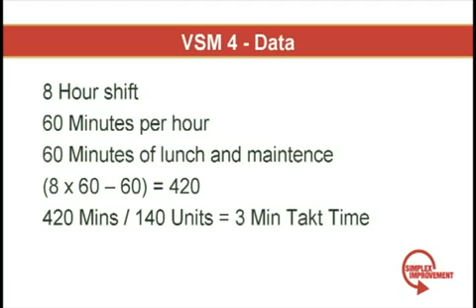Now, with each iteration, the CEO wisely tells us to continue to refer to the ideal state map. He always makes sure that the team is focused on the final state they are attempting to build. The team keeps this in mind and realizes that in order to reach the ideal state map of a dedicated cell, they need to start focusing on shifting workers to balance cycle times to meet this 3-minute takt time.

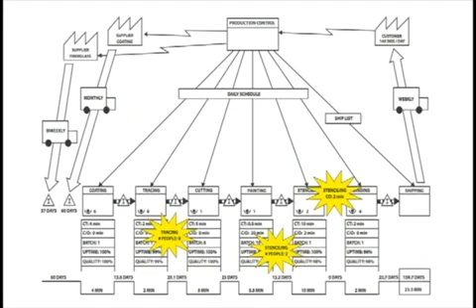The state-of-the-art painting booth is a challenge because it's designed for large batches and the accounting department wants a quick ROI. So the work continues, and by the 5th iteration, the team is able to begin dedicating small areas solely to red skis. Only the large paint booth still services all product families and remains a shared resource.

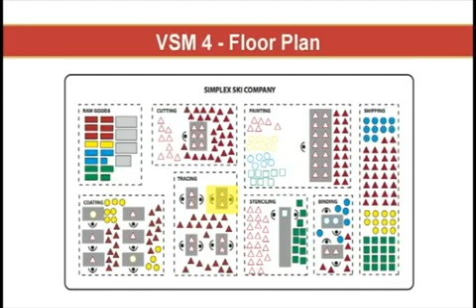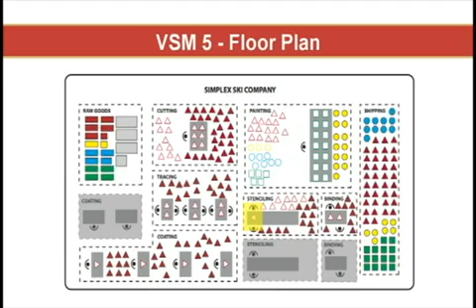In order to create a stenciling area dedicated to red skis, we needed to shift 2 operators from the now overmanned tracing area. 2 operators in the Value Stream Mapping, or VSM team, agreed to move over to the red ski stenciling area. Take a moment to notice how the shop floor is starting to change. On the 6th iteration, the team continues to work on the cycle times of each station to meet the 3-minute takt time.

By the 7th iteration, the team gets to the point where they've driven down cycle time per operator and feel confident by the next iteration they can work towards single operator stations. By the 8th round, the floor begins to take shape. Notice how much less clutter there is on the shop floor. Each station, except paint, now has a single dedicated worker.

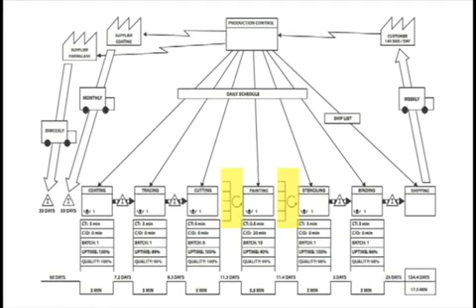In this iteration, the team is also working toward establishing a pull system. Notice the supermarkets that were put in place right after the cutting and the painting areas. The team takes a look at the ideal state map and realizes in order to create a cell with flow, they must first master pull.

By iteration 9, the team has grown frustrated with the paint booth dilemma. Painting takes seconds, and they've done as much Kaizen as they can do to reduce the setup times. We successfully reduced the paint booth setup times from 30 to 20 minutes. But the high-tech nature of the machine makes physical modifications prohibitive.

One of the operators on the team suggests that we dust off the old manual paint stations that are sitting in the warehouse collecting dust. These were retired 2 years ago after the VP of Ops saw this new paint station at an expo in Atlanta. With a little cleanup of the manual station, they could be installed and ready for use.

The CEO catches wind of this and confronts the team. He obviously wants us to make the best use of our high-tech investment. The team shows him the ideal state map and reminds him that the high-tech paint booth doesn't fit the model. The CEO reluctantly agrees. The team has proven to itself and the rest of the shop floor that the pull system they installed works great.

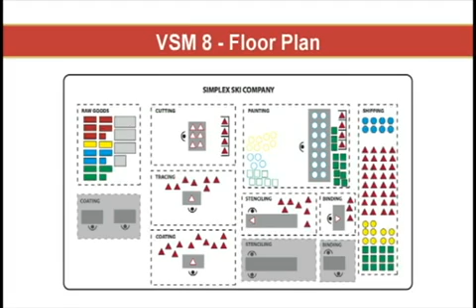And with this new/old manual dedicated paint booth, the team is ready to actually segregate the area and begin working in a production line. Prior to this, we had dedicated stations that were still in a process village format. Moving stations close together to create pull and then eventually flow is in line with our ideal state map.

Now, finally notice that the team has demonstrated their improvements and feel confident to the point of increasing their shipment frequencies. They negotiate a deal with a customer who is more than willing to pay a premium for the daily deliveries. The customer is delighted because it's a win-win for both parties. He's happy because he doesn't need to dedicate valuable floor space to store a week's worth of skis. They take this money and apply it to the additional shipping costs associated with the more frequent deliveries of raw material fiberglass. Now, the Simplex Ski Company is shipping and receiving more frequently.

By the next iteration, with growing confidence in the more frequent deliveries, production, uptime, and quality, the team feels it can decrease inventory across the system. Notice the radical change to the shop floor and the proximity of the stations to each other. In this next iteration, the team and the shop floor are now comfortable with using withdrawal and production Kanban.

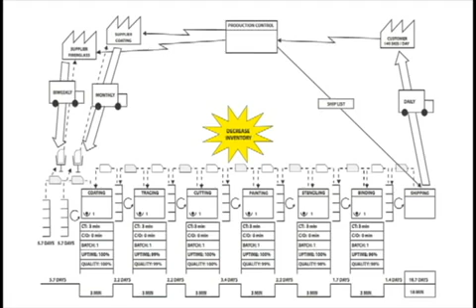Now, because of the proximity of the stations, one of the team members asked if we can do away with cards between stations and create FIFO lanes, or first in, first out lanes. He argues that all the stations are stable enough to begin producing to a very small FIFO lane. This makes the team a bit nervous because this would eventually call for the significant decrease in WIP, which has kept the system running smoothly. But the team decides to take the training wheels off.

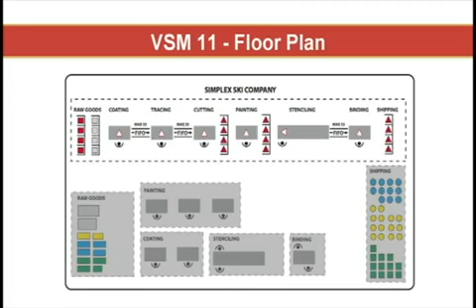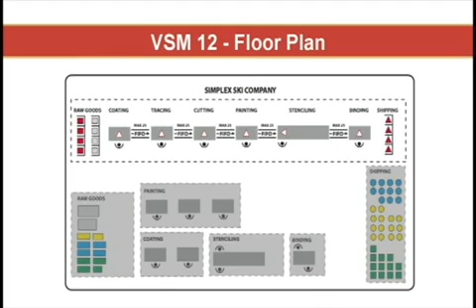The math proves out, and in the spirit of Kaizen and the ideal state map, the team decides to give it a shot, and all the stations except cutting and painting, which are still a bit unstable, are moved to a FIFO system. Cutting and painting will send their Kanban back to the beginning of the line where we're trying to establish flow. By value stream 12, the team decides to go with FIFO pull only. The only supermarket pull would be from the shipping department. Units shipped will trigger a Kanban to go back to the beginning of the production line and start production.

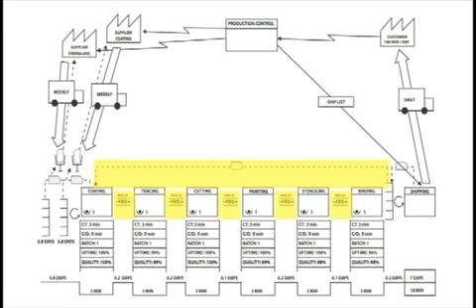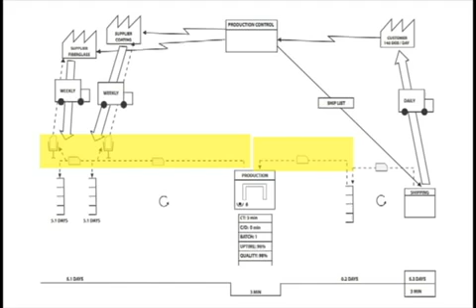By value stream 13, the team proves out the improvements and want to decrease inventory in the FIFO lane to none and begin exploring the dedicated U-shaped cell seen in the ideal state map. This is presented to the CEO, and he's very excited to see the concept prove out. The shop floor once again is rearranged and a cell is established. It's manned with the same 6 people, and they're very comfortable now working side by side. Kanban flow out of the cell to request raw materials and flow into the cell to trigger production. The system runs very smoothly.

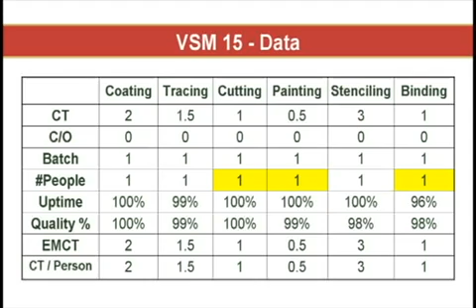Now, by value stream 14, the CEO is very excited by the improvements we made. He wants to stop and move on to replicate this on the other product families. The same paint booth operator objects. He explains that there's still opportunity to drive to the 3-man cell and that abandoning the vision now would hurt morale. The CEO gives a thumbs up to continue. By value stream 15, the math proves out and they can decrease their 6-man operation to 3. The team drives down the cycle times of each of the work areas so 3 operators can now absorb the work previously done by 6.

By value stream 16, they want to take on the challenge to rebalance the work. They decrease the cycle times of the stations within the cell and drive toward a 3-man operation. Now, rebalancing takes some time to get used to because operators are not used to running other pieces of machinery. A 3-man cell means that operators have to run multiple stations. The operators adapt pretty quickly because Simplex Ski Company has well-documented standard work.

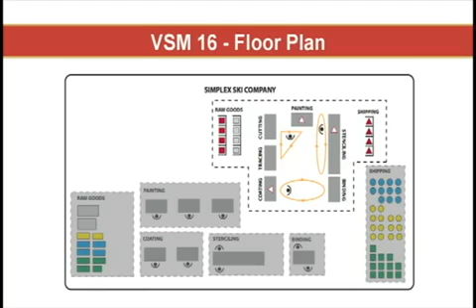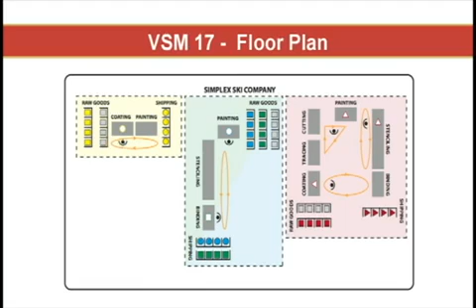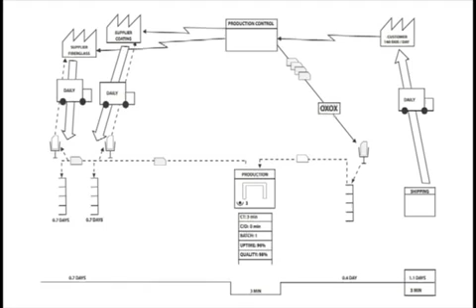So by value stream 17, the 3-man cell is proven out and the team is ready to implement this across other product families. The team finds that an L-shaped cell works best for the blue and green product family, and a linear cell works best for the yellow product family. The cells are working well, and the last step is to get production control involved in this new mixed model system. So instead of sending a shipping list every day to the shipping department, production control now uses Kanban to control the pace and pulling of what is produced. This is done through a Heijunka board, which is located just outside the production manager's office.